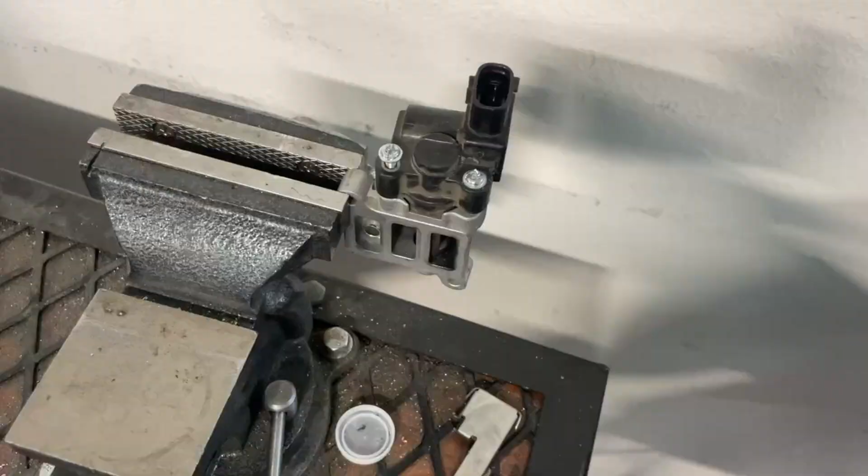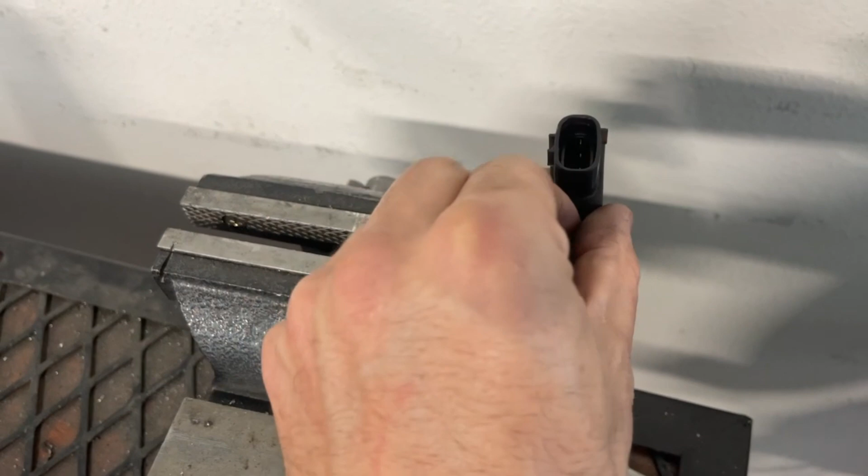So I guess this is not a Torx bit, or it wasn't a Torx bit. Now it's a flathead. I got it, but I gotta take it apart and see how gross it is. It definitely looks, well, not great, but let's see how much movement we get.

So I did clean it, did my best. I hit it with some brake clean, got all the schmutz out, and then I hit it with some air, just trying to get it all worked out, then WD-40 to try to get the last little bit of grime, and then some more brake clean. Once that was good, I went in and used some lubricant around the joints and anywhere it meets. My goal was to try to get as little resistance as possible on the rod, and so far it seems pretty good, but we won't know until we try to get it to idle. So let's see what happens.

So after cleaning the idle motor, the car starts normally, idles. I don't have the coolant gauge hooked up on the dash yet, but yeah, normal start now, and it opens up on decel, so I'm not stalling anymore. So that worked.

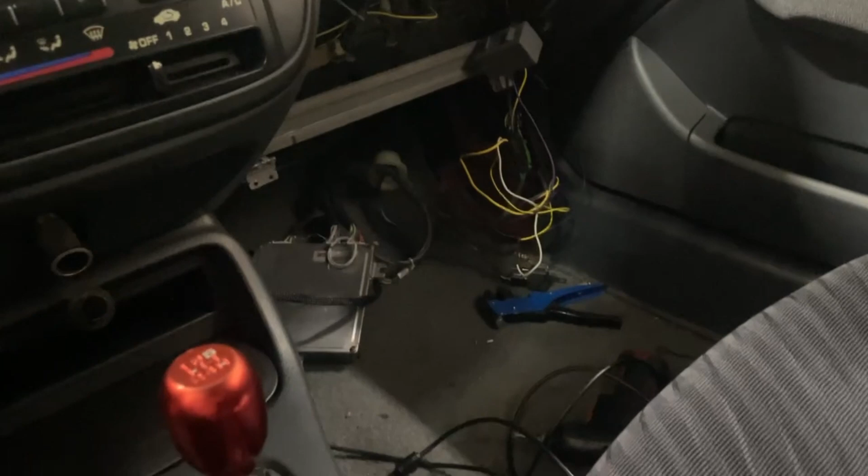So the plan is to take the wiring and clean it all up. The wideband is not working, which means I disconnected it, and I'm not really sure which wires it is, but there's wires going to the floor mat. It's everywhere, it's kind of unruly. So I'm gonna clean everything up and make sure everything works, and then I'll get back to tuning.

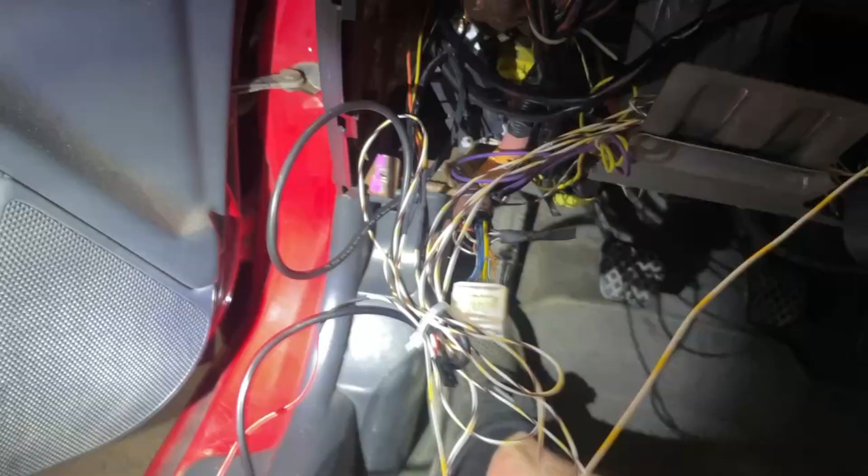All right, so this is the rat's nest I'm dealing with. There's wires everywhere, all over the place. And then there's things like this - this is some grade A stuff right here. It's all good, I guess. I'll start somewhere, it's just where does any of this even go? There's just so much up there.

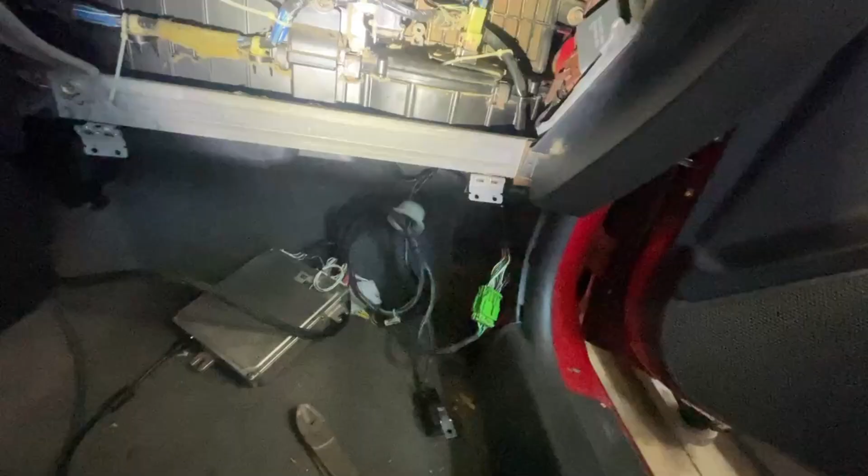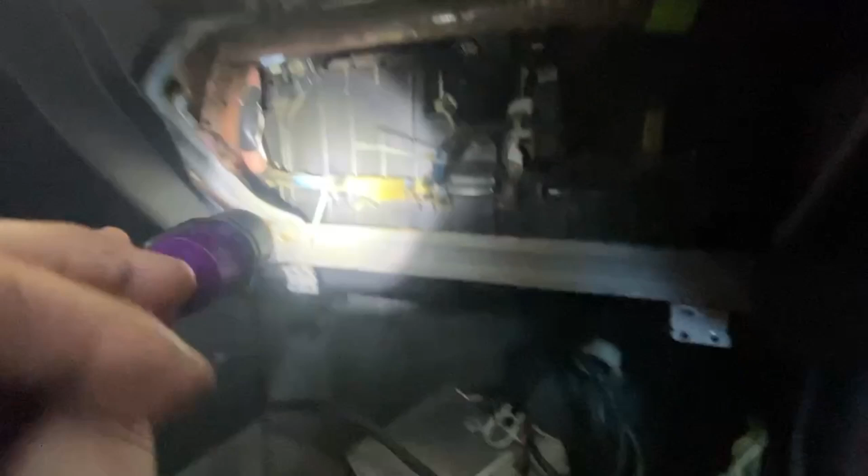All right, let's clean it all up. So wiring is just about clean. There are no exposed wires. There's nothing with tape that isn't crimped together. If you come to the other side...

I've got all this cleaned out, and I've got the dash harness built for the cluster for the two gauges. So I've got my boost gauge and my wideband going in.

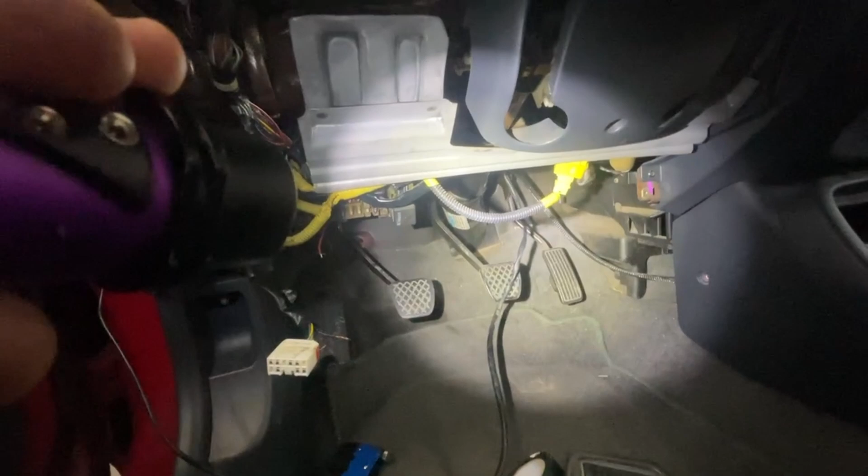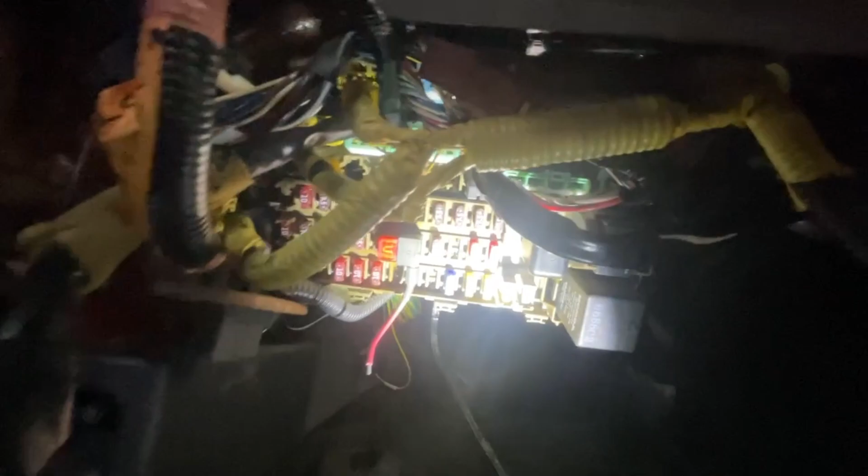The last part of this was to determine how I was going to do power and ground. It looks like they had a couple spots that they were tapping into for some reason, and a few more that I just noticed hanging around. But I'm gonna go with - it looks like they had an open ground right here, and at some point installed a fuse jumper. These are great, this is probably the best way to do this. So I'm gonna use that for power, that for power, that for ground.

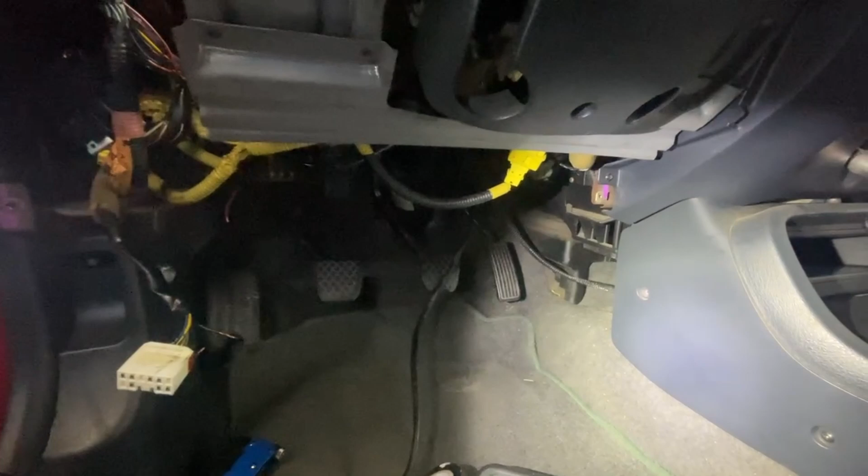And then I've got to run a second harness under to get the serial data. I'm gonna make a jumper harness off of the ECU that's gonna come out of the case, and then into under the car, and that sends the serial signal to the gauge so that I can communicate with my wideband over serial. I'm gonna add a few wires in case I want to add other inputs later, but for now it's just gonna be the serial connection point, and then I'll just deadhead the other pins.

So yeah, I'm gonna get this installed, and I think the order of operations here is a little tricky because I have to get the ECU put in the car. The reason I have to do this is because I want to make sure I bring out the flying lead out of the ECU case in the right spot. So you got to be a little careful how you do this, but once it's done, it should look really good.

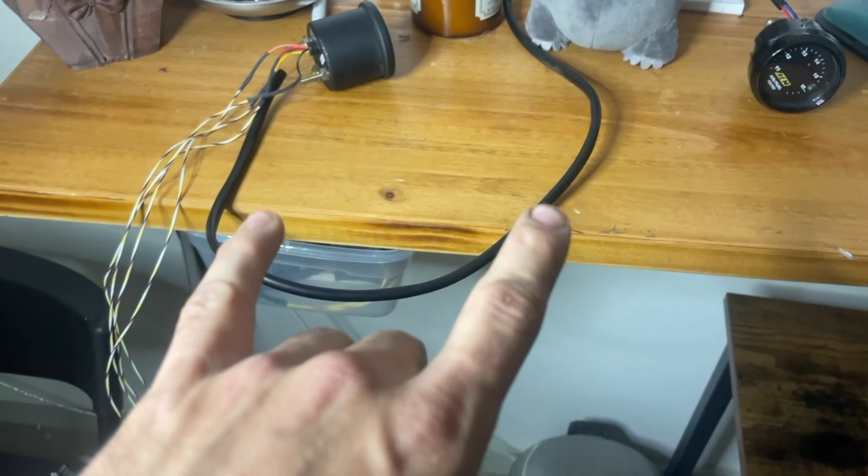Okay, so I'm going to connect them. I haven't fully decided if I'm going to do 2 into 1 or 2 separate. It really doesn't matter, but maybe it'll come to me as I go. But I'm going to start by just breaking down the wires, figuring out what's what. It should be power, ground, signal.

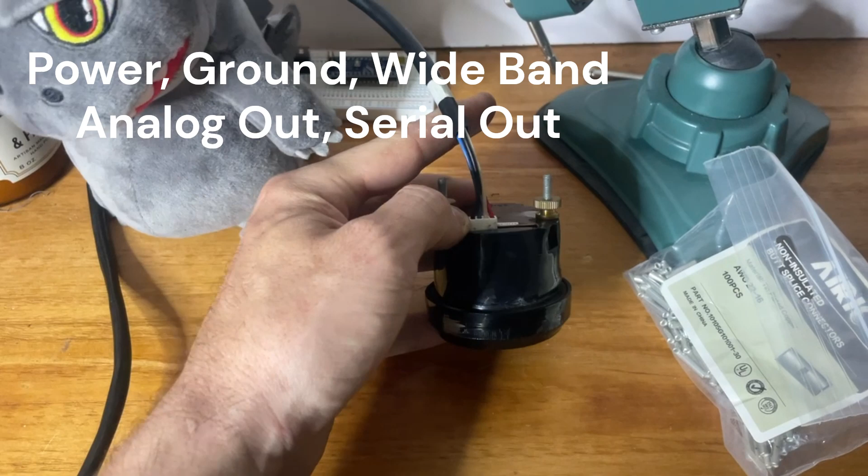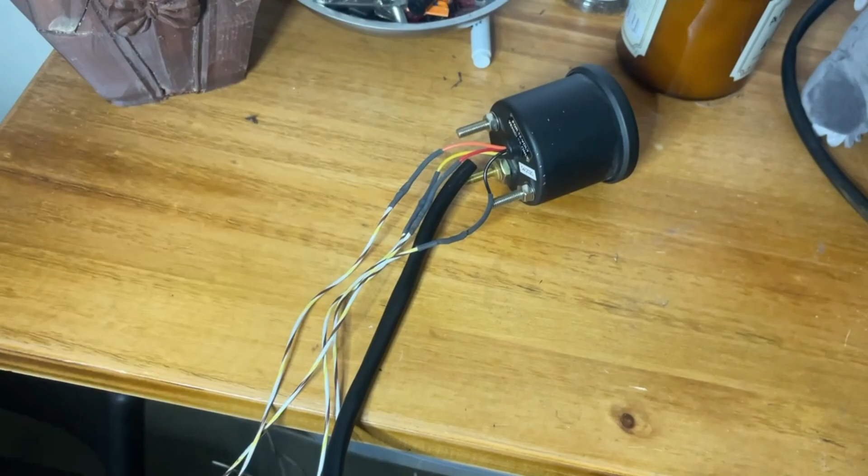Power, ground, signal, and then wideband out, I believe, for this one. And then this one is likely power, ground, and then maybe illumination circuit. I'm not really sure why you need 2 other wires for the dumb gauge, but let's do some digging and figure it out.

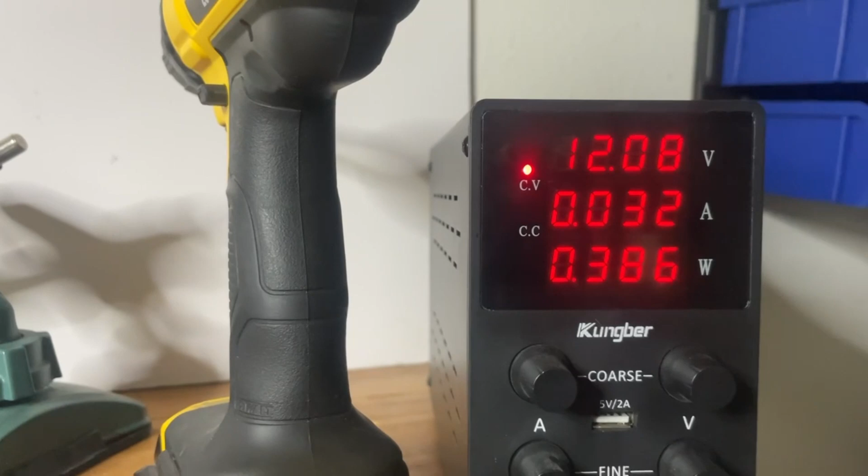All right, I just tried a quick test with my voltage supplier, voltage brick, I'm not sure. So it looks like the orange is memory save, yellow is illumination, red power, black ground.

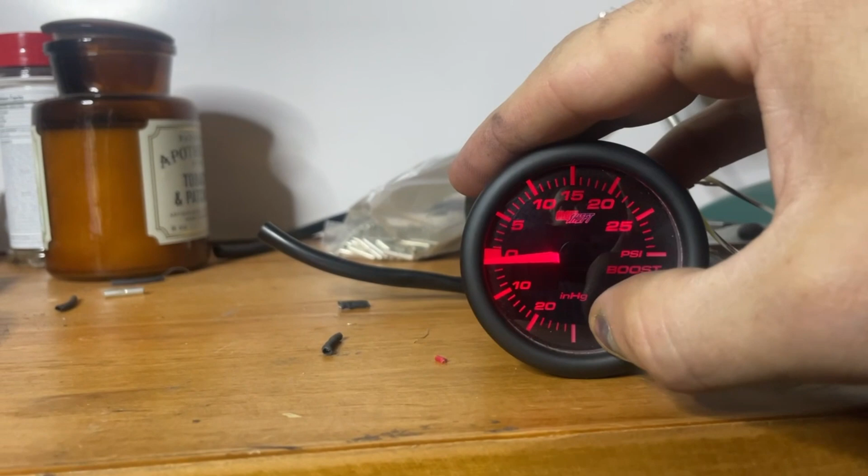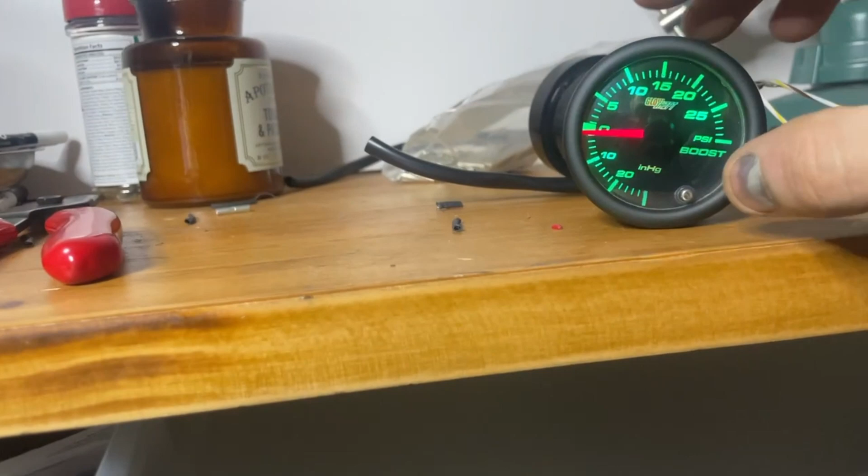Like I don't really need -- wait, why is that green? Wait, what? I guess there's a touch-all-of-them setting. Oh, and then this one is like a color shift. That's fun. Yeah, no, I'm good.

So if I shut it off, okay, and then power back up, it's gonna default to blue every time, and I'm cool with that. I don't need anything else because I don't plan on running this super long anyway. So that'll cut down on that circuit.

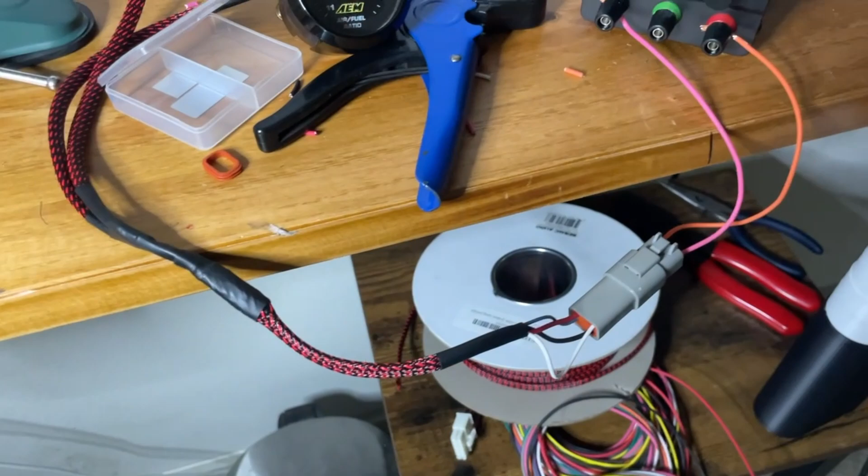Get to the wideband and then put together. All right, final product. Everything is crimped, terminated, and then heat shrink. I've got the Deutsch pins in, and I have a little test connector to make sure everything works.

So I'm going to power this up, and I haven't checked this yet, so if it doesn't work, I'm going to look dumb. Ciao. I'm loving it, I'm loving it.

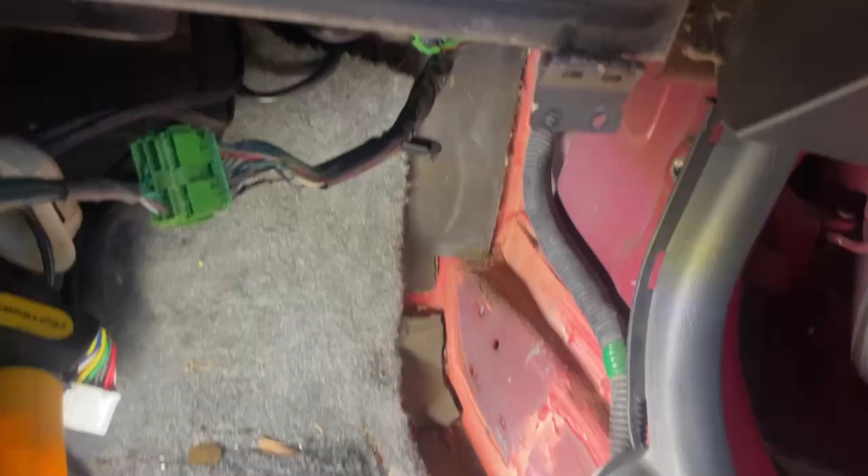Yeah, cool. So now I just got to load it up into the car and find a usable power source. So this is where the ECU is going to live, it's where it lives standard. I've got 3 bolt holes, one there, and one there.

Now in the past, I would just measure and figure out the brackets and just go from there. But now we're going to try something different. And now for something completely different.

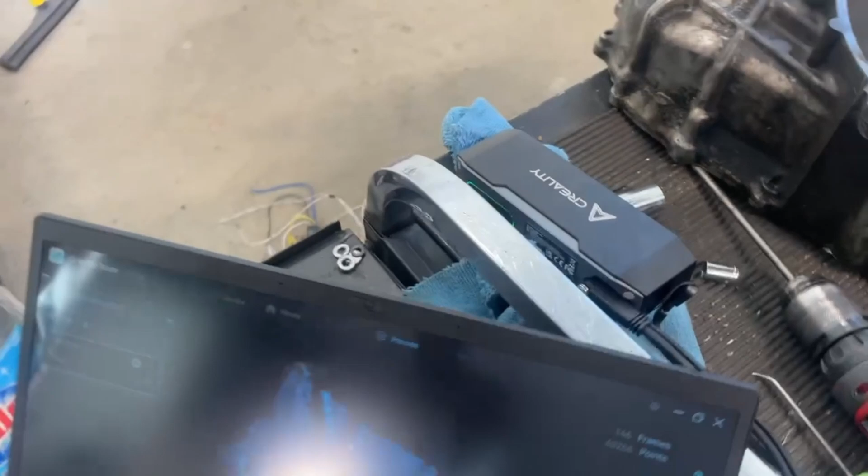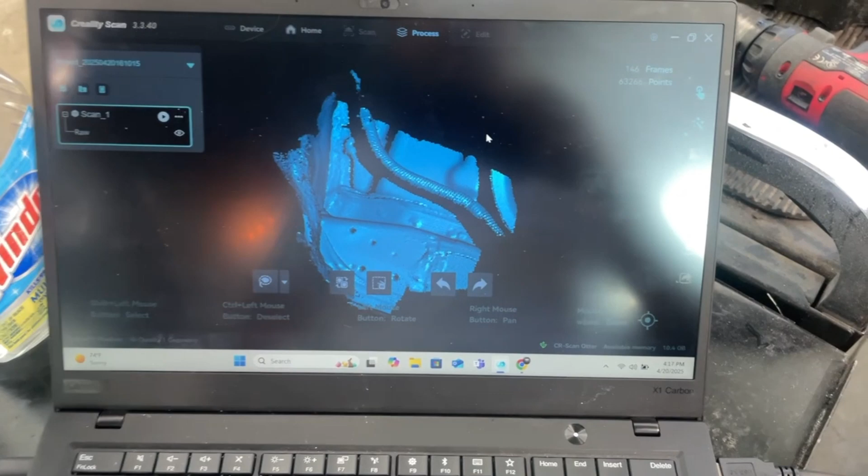So now we have the CR-Scan Otter. What the otter scan does is it lets me look at the geometry, so when I go to make my brackets, I can just place it on the scan, and then when I go to design it and print it, it should be perfect. So I'm gonna go ahead -- I gotta redo this one because I missed the little hole right here, but I'm gonna work at it till I get it, and then see if I can get the scan into my machine and get designing.

So this is the final product. As you can see, it struggled a little bit with some of the wiring loom, but what it didn't struggle with was the holes. I've got a perfectly clear vision of the holes, and if this came out well enough, I should have the depth, so I'll be able to make my bracket hopefully with pretty decent ease.

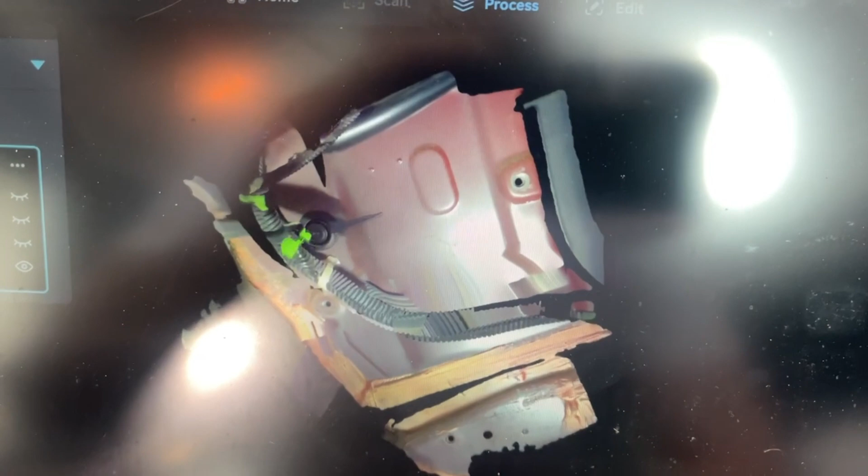So let's get this into SolidWorks and see what it does. So this is the basic shape I got for the bracket. I kind of just worked it until I got the geometry as parallel to the face as possible, and then brought the bracket down to the STL as close as I could.

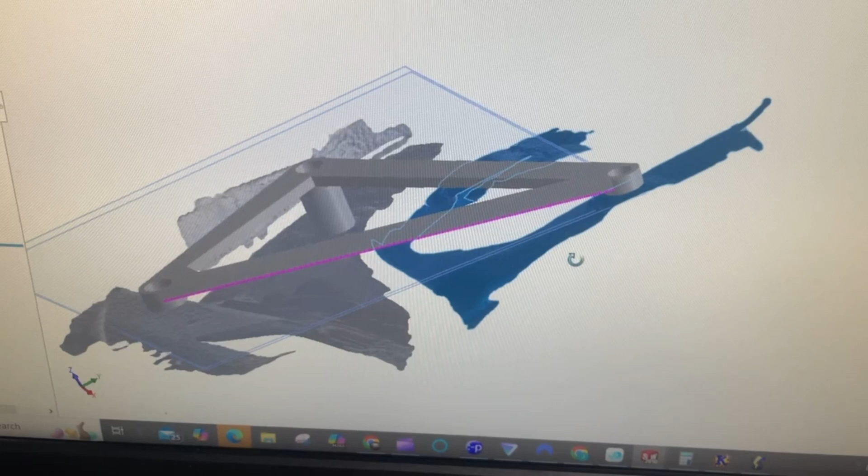So we'll see if this works. If this does work, we're in business. If not, no worries, we'll give it another shot. I've been 3D printing car parts for probably a decade now.

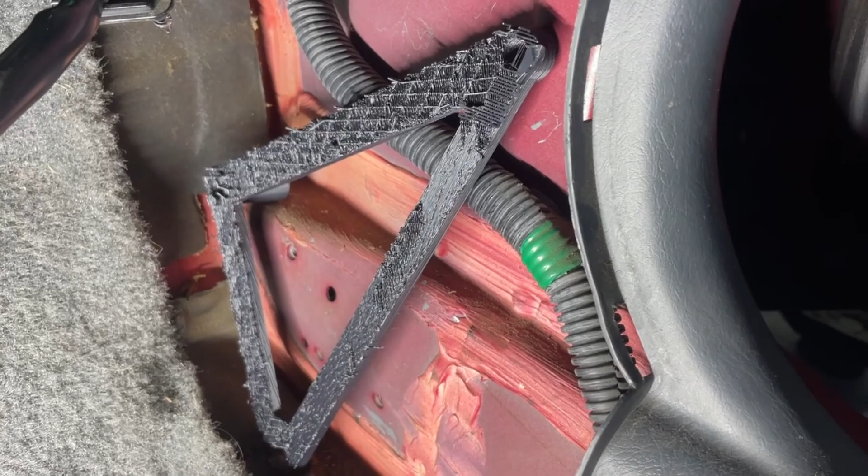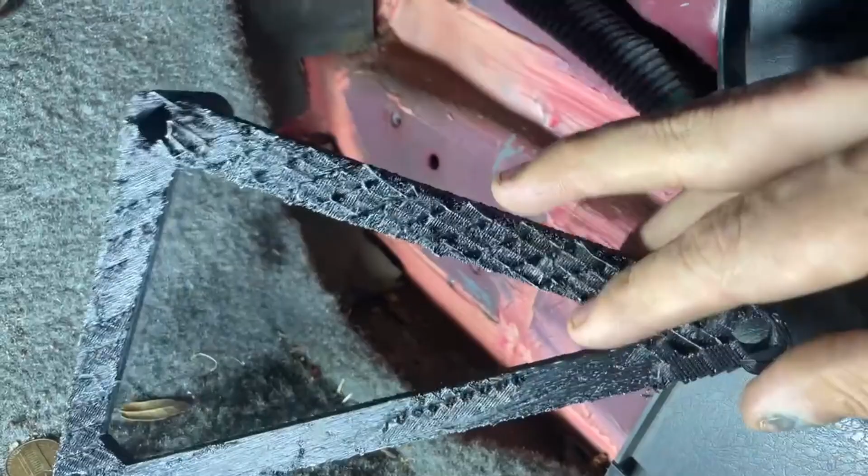This is so far my favorite thing that I've ever done, because this is the first time I was able to take a scan and within a few minutes just replicate a part. Well, not replicate -- design a part.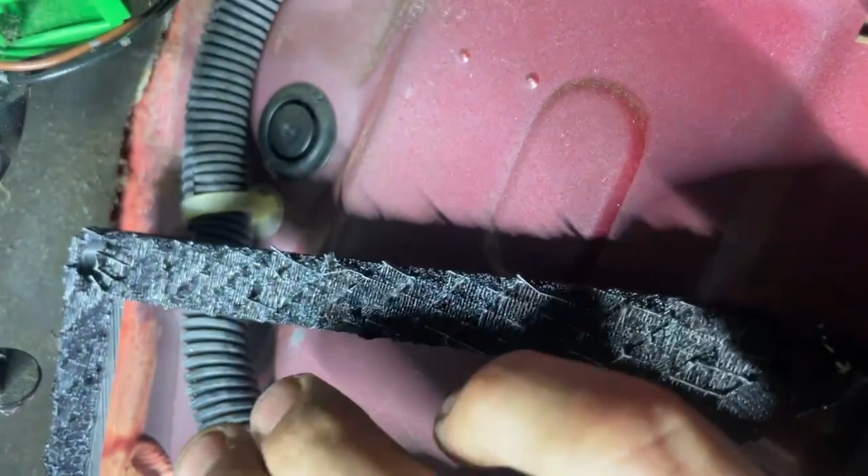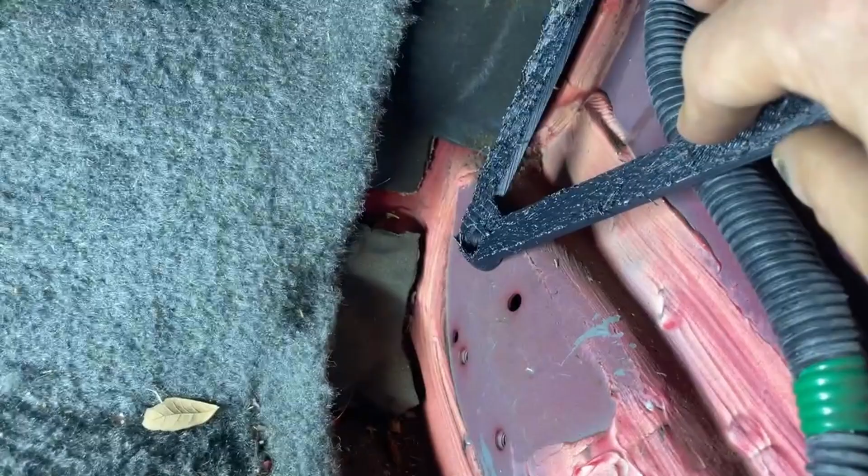So this fits perfectly right where it should, right over the loom, like all the holes. Let's see if you can see. All the holes line up, like everything's perfect. I mean, my design speeds are gonna skyrocket. Like I'm just gonna be able to rip through so much stuff. So yeah.